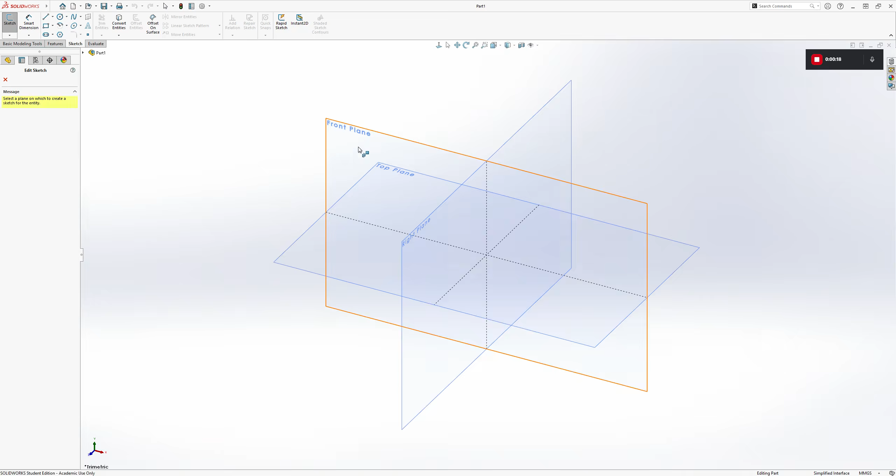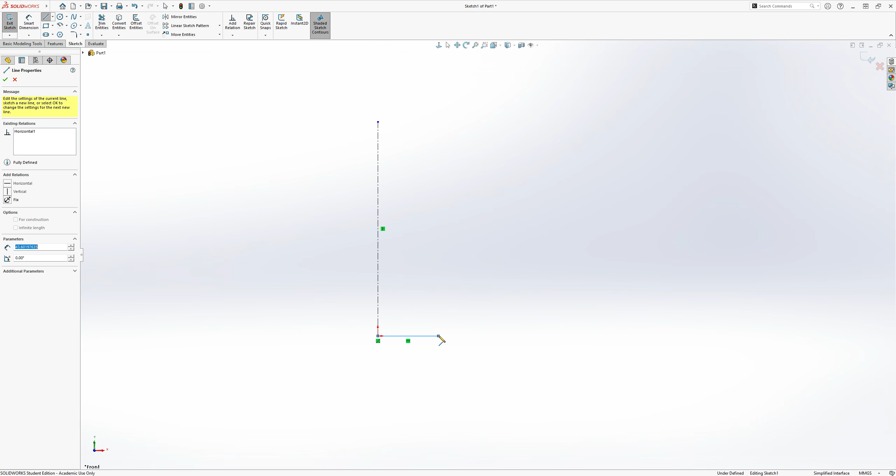First, let's set our center line to prep the mirror tool we're going to use. Let's draw the right side, setting the base geometry about here, then go up. Then we'll have two diagonals, one and two, into horizontal.

Now let's mirror all that to the other side.

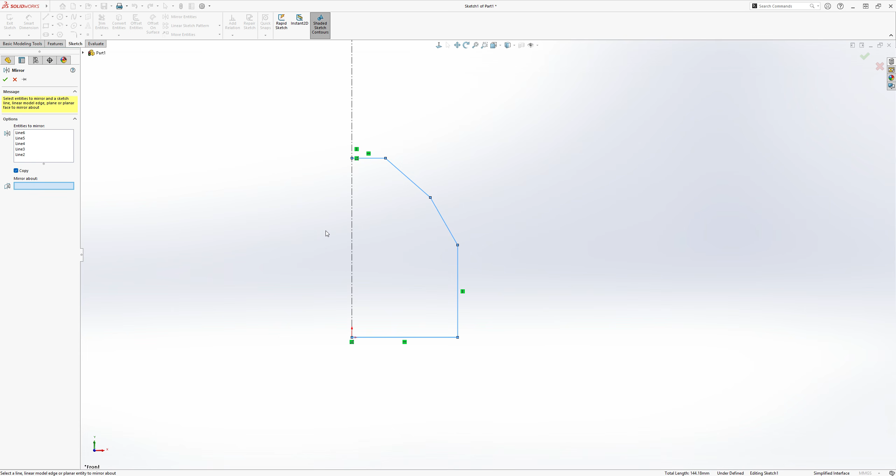And let's start adding dimensions. The total width of the part is 84, and the total height of the part is going to be 71.

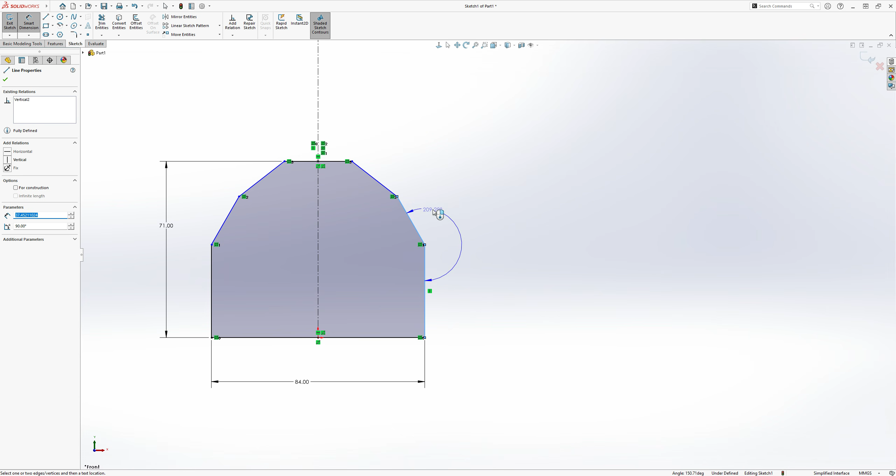The angle from the vertical for the first diagonal is going to be 33 degrees, and the angle of the second diagonal from the center line is going to be 51 degrees.

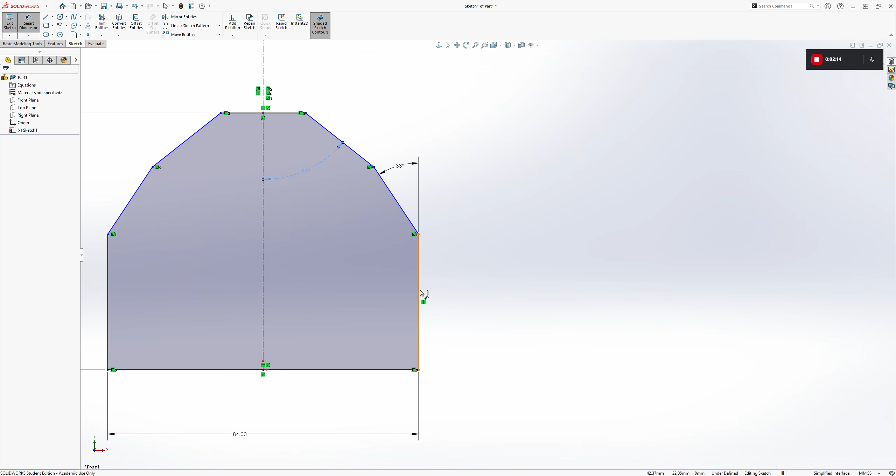The distance, or length, of the vertical line is going to be 35, and the distance between the endpoints of the first diagonal is going to be 18.

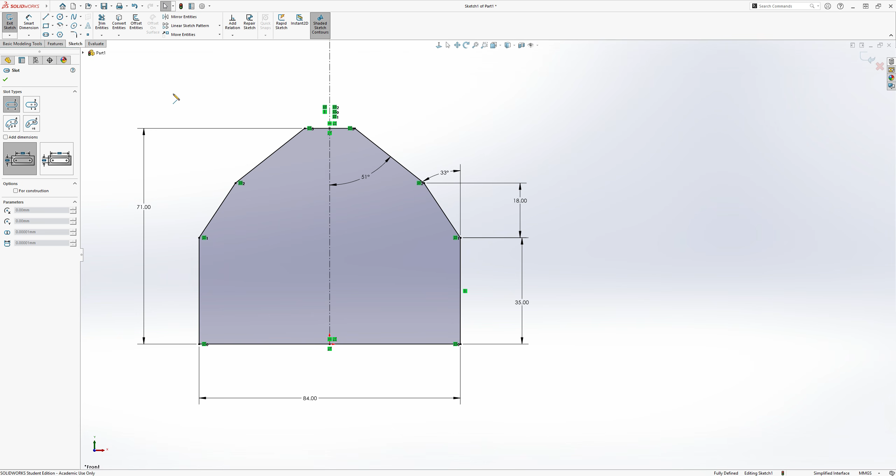Now we're going to add our slots, our vertical slots. Let's make sure the center is vertically aligned with the origin. Its width is going to be 8.

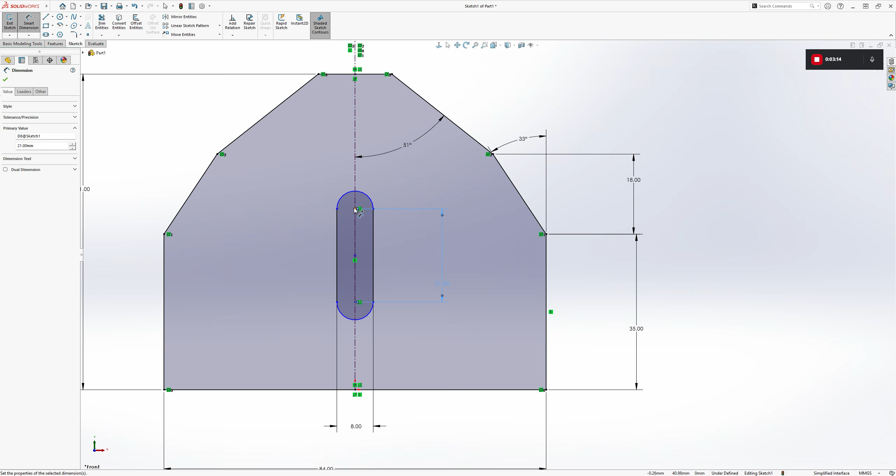Distance between its arc center points is going to be 21, and the distance between the top arc center point and the bottom edge is going to be 39.

Now that should be it for the first sketch. So do feature, boss base, extrude.

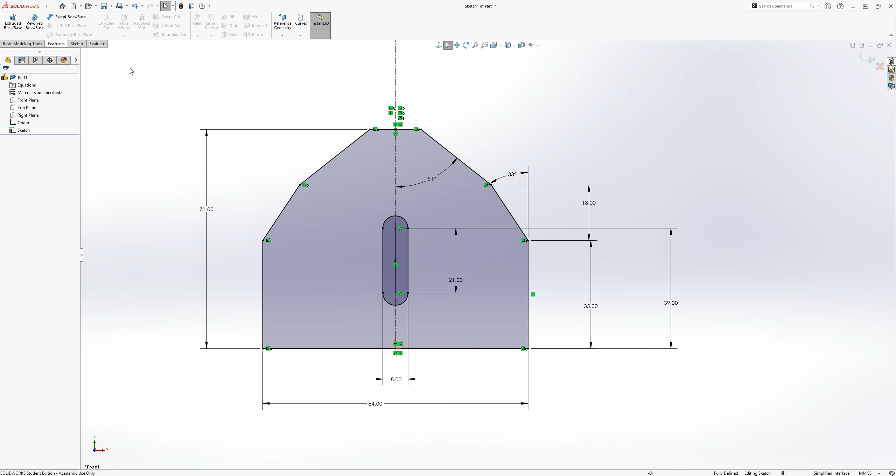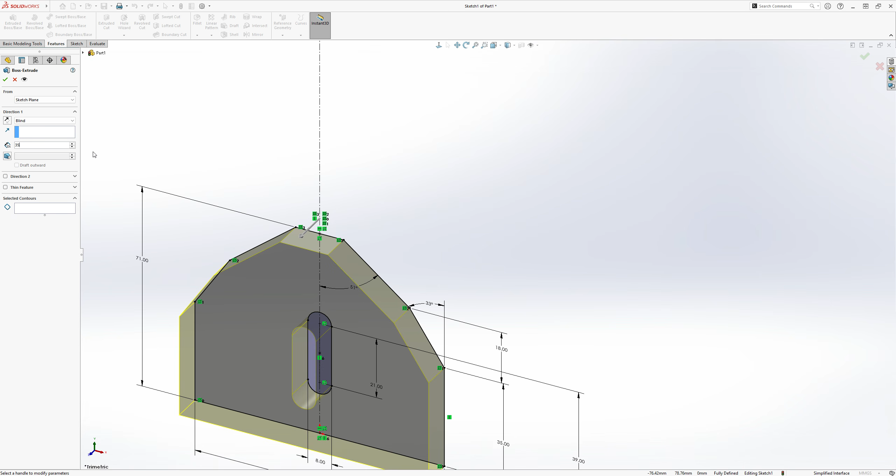We'll do a blind extrude. Reverse direction. Oh, actually no, we'll keep the direction. And we'll blind extrude by 25, or sorry, I mean 35. Yes, 35. Select OK.

Then let's create our first sketch for our first cut in the right plane, and we'll start with a corner rectangle.

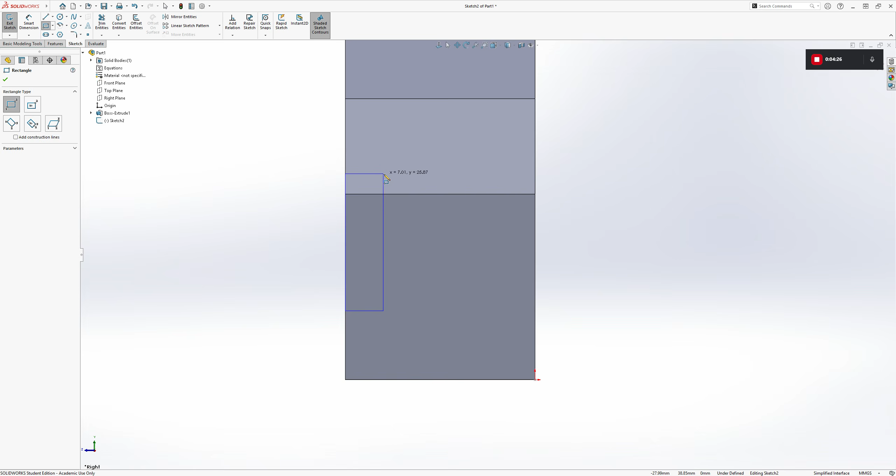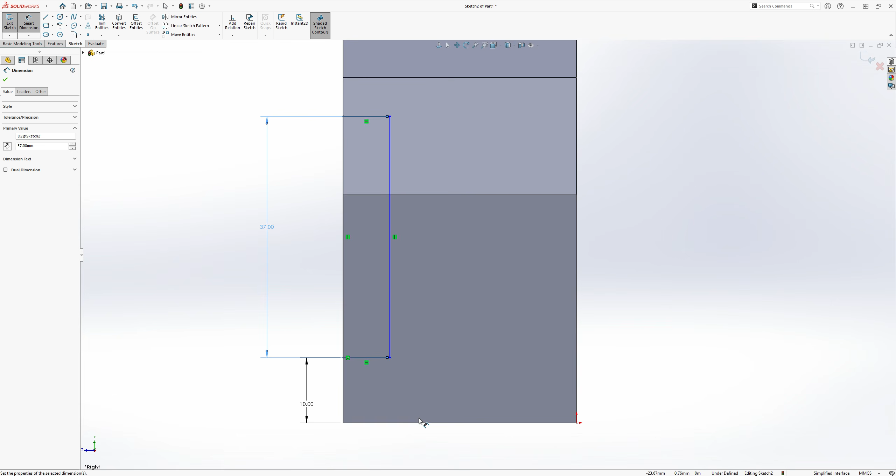Distance between the bottom of the corner rectangle to the bottom edge is going to be 10. The total length of this rectangle is going to be 37. And as for the width of this rectangle, that is going to be 12.

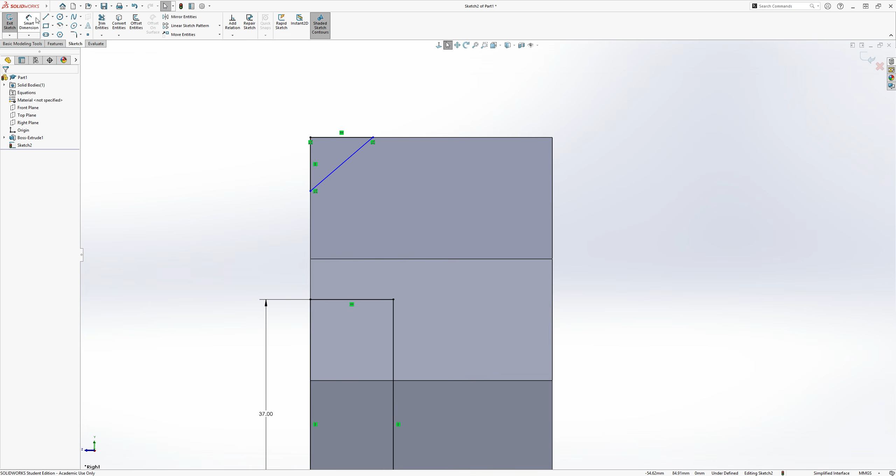And then we'll add a triangular cut up here. The angle between the horizontal and the diagonal is going to be 35 degrees, and its base is going to be 15.

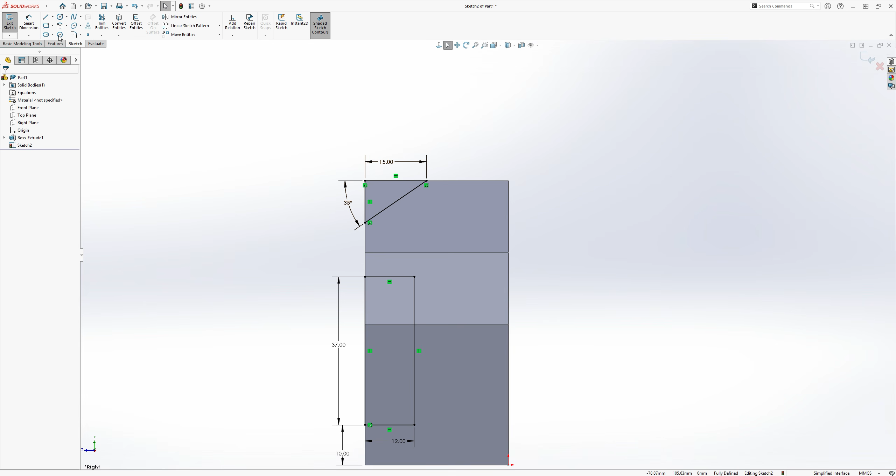And we'll proceed to make our cut through all. Select OK.

And then finally we'll make our last sketch for our last cut in the top plane. Just like before, we'll draw our center line, prep the mirror tool, and draw a corner rectangle from the left corner.

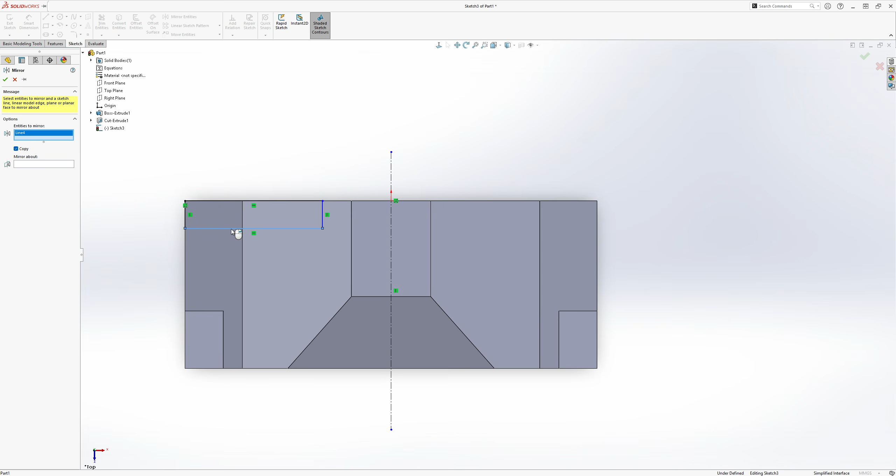Let's mirror the rectangle. Distance between their inner edges is 25, and the respective widths is 8.

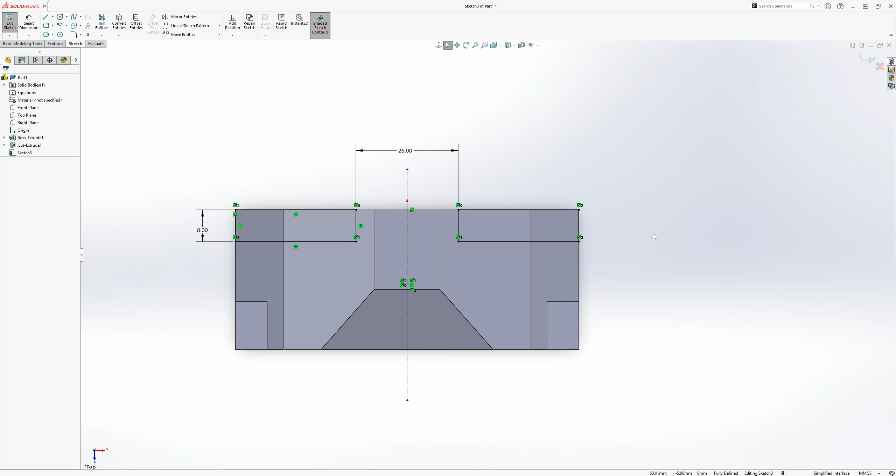And we will select feature, extrude cut, through both, select OK. And that should be it.

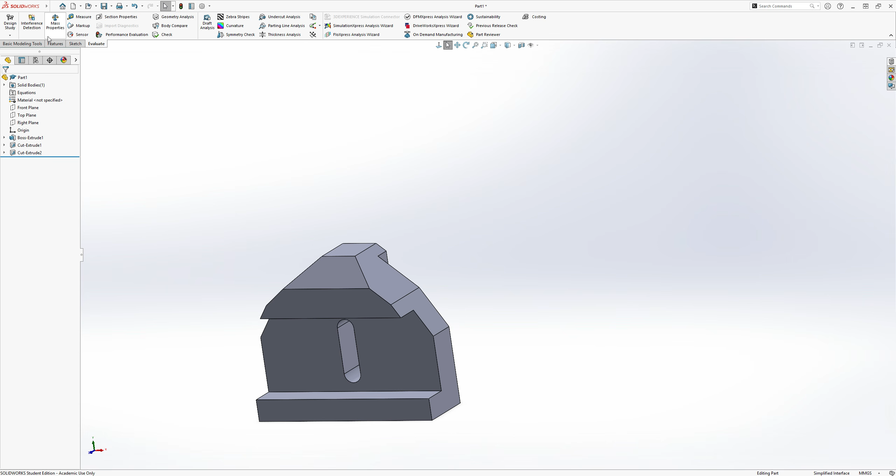That's your final part. We'll check the mass properties, and the volume ends up being 104,107 cubic millimeters. Hope you learned something from this video, and I'll see you in the next one.